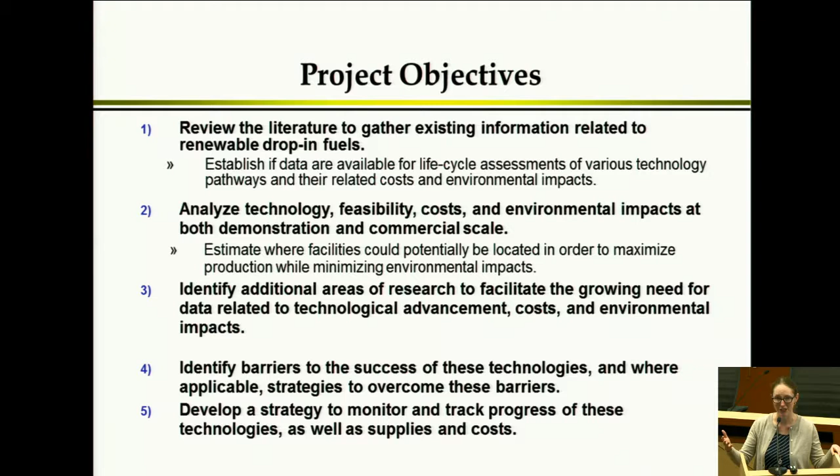that are more challenging to overcome, and figure out a strategy for updating the analysis, because things are always changing, new research is coming out, and so we have to be able to incorporate that quickly into the analysis if we want to do a refresh at some point and see where things are maybe 5 years from now, maybe even 10 years from now.

So I'll go through task by task, basically. Task one, we just wanted to review the literature and ongoing lab research that we're aware of, even if it's not published, and understand where things stand.

And just a quick bit of background about me. I've been working in bioenergy in some form or another since fall of 2007, basically. I worked primarily in the Energy Biosciences Institute, which was funded by BP. It was joint between UC Berkeley and University of Illinois, Champaign-Urbana. And once the funding wound down for that, I ended up transitioning over to the Joint Bioenergy Institute, and that's where I spend about half of my time now. And so, I've had a good perspective about what's been going on in the research space, at least at those two institutes, and more broadly.

So when we look at what fuels we're trying to replace, let's assume the goal is to replace petroleum in some way or another. Gasoline obviously has the largest share. This is in California, so a little over half of our crude oil goes to producing gasoline. The next largest, interestingly, in California is jet fuel, just by a little bit. So that's the slightly darker blue slice there. And then diesel's pretty close at 16%.

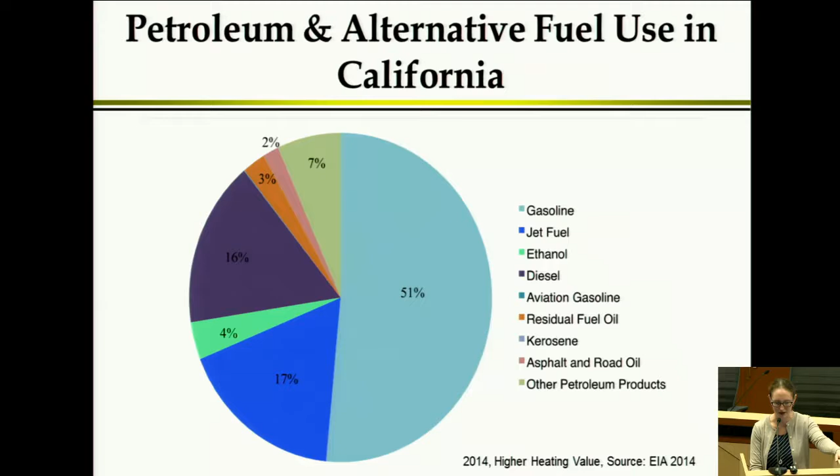So a quick review of the fuels we're interested in replacing. Diesel is about 75% saturated hydrocarbons, 25% aromatics. Gasoline has aromatics at about the same level, but more of these cyclic molecules, fewer of the straight long chain hydrocarbons. And jet fuel is a similar makeup to diesel, a little bit different, but often when people are looking at the mixture of fuel that they've produced in the lab, the potential jet fuel products and potential diesel products often look not dissimilar.

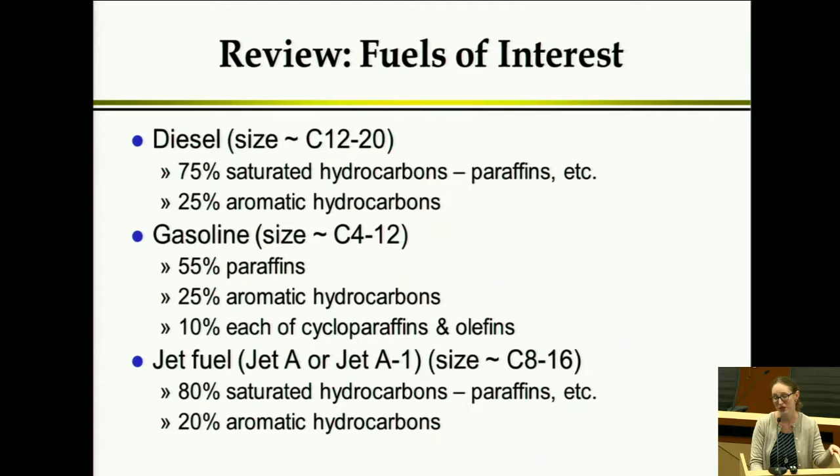And in the military, for example, they've considered moving entirely to jet fuel for the sake of ease of logistics. So, you can use jet fuel in diesel applications. There's some retrofits required, but that's one thing that they've been looking at, is just using jet fuel for stationary generators, for their vehicles, where you would typically be using diesel for some of those land applications.

So, general things to note before we really dig into the research. There are a couple different types of what we would call drop-in fuels. The first is you can make a bio-based crude that just goes into petroleum refineries. So that's the first place in the supply chain that you could insert a bio-based liquid. And then, in an ideal world, hands off, it behaves just like crude oil. You don't have to do anything differently.

That would be great. To me, that's the best case scenario, although nobody's really been able to achieve that. Usually the bio-based crudes, you can blend them at a pretty low level before you start having to make changes to your petroleum refinery. The other option is that you have a separate supply chain up until you make the finished product. And then that finished product can at least go into regular petroleum pipelines.

And usually when people talk about drop-in fuels, that's what they're talking about, is it can go into all of the same infrastructure. It can go into your engine. You wouldn't know the difference. And that's also pretty challenging for a few reasons that I'll discuss.

The term drop-in is used pretty liberally, I've found. It sounds great. It's a very catchy term. And so it gets used for fuels that you can't actually blend one-to-one, where you could just put 100% of this new fuel that you've produced in your engine and it would be fine. It's been used loosely to denote things that can be blended at more than a 10% level.

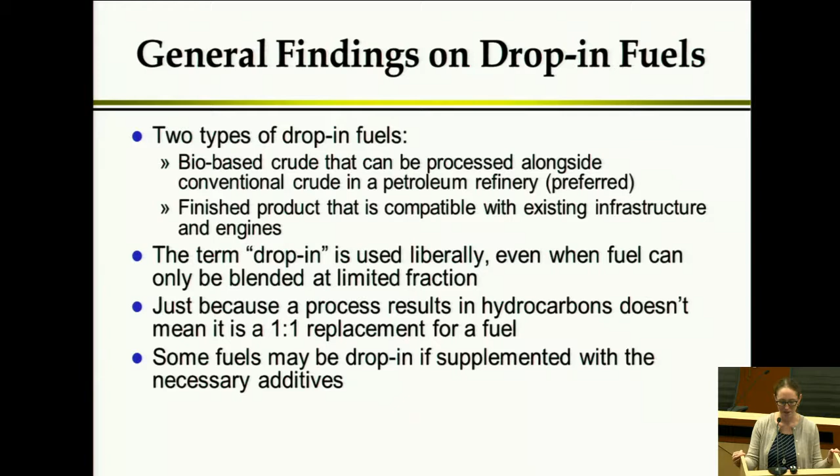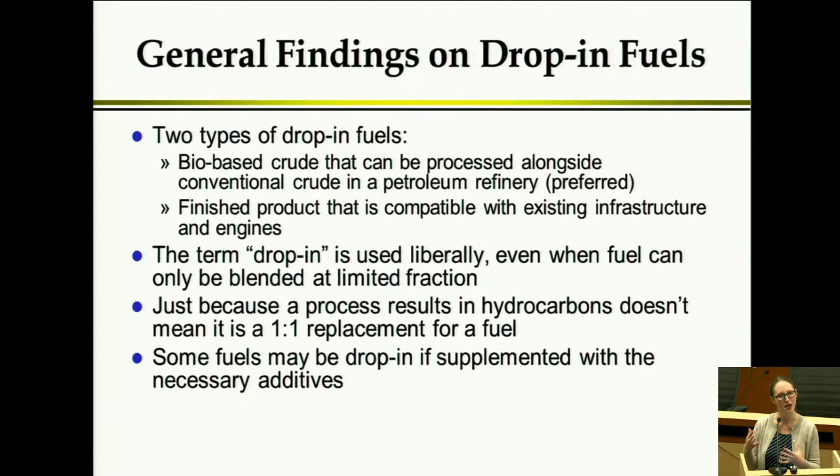And there may be instances where a fuel is drop-in, but you need some additives. An example would be sort of fuel oil that you could use in a marine application. So you maybe need some stabilizers or something. But in general, it's pretty close to drop-in. And so that's one example of something that's nearly drop-in, but again, the line is blurry.

The other challenge with these fuels is that, you'll see results. If any of you have dug into the literature, especially from the national labs, you'll see all of these reports where they do Aspen models and they say, look, you make this amount of gasoline, this amount of diesel, this amount of jet fuel. But the actual empirical research that's going on is at a really small scale. I mean, most of these labs are making like milliliters of fuel.

Engine testing people cannot take a milliliter of fuel and do anything. So, they need like barrels of fuel. And if you are in a small lab, you're sitting there at your bench, you're not going to make barrels of fuel. There's no way. And so there is something of a disconnect with these quote unquote advanced pathways. The research just hasn't gotten to a place yet where you're actually going to send it to a pilot facility and try to make enough for the engine testing.

And in some cases, it's sort of chicken or the egg. You don't want to make a whole bunch of it just to find out that it's a terrible fuel. On the other hand, you can't do much testing with the sort of volumes that are typically generated at bench scale research. There is a DOE-funded effort to try and bridge that gap called Co-Optima.

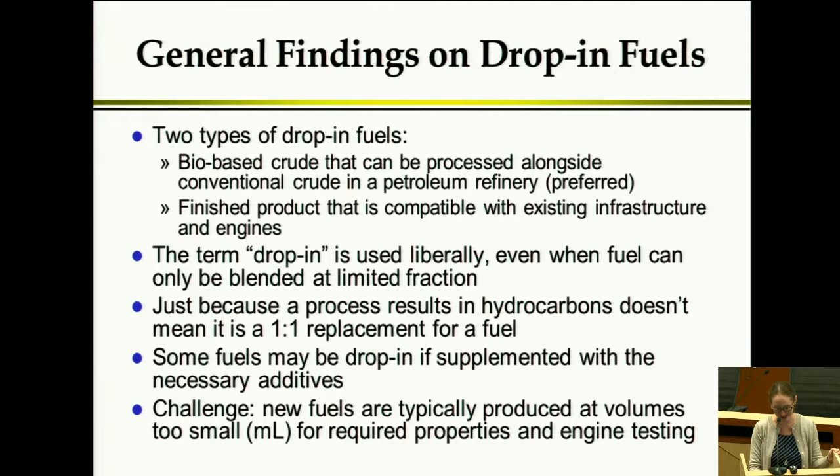And there are a lot of engine testing people who say, well, ethanol is really great. It's high octane. You know how to make it. It's cheaper to make right now than many of the others. Why aren't you just making ethanol? So it's tough. It's really tough to do this.

So what is a drop-in diesel? Remember, there are a lot of characteristics that you have to consider in making diesel that works with our existing infrastructure and engines. I will not read through all of these, but these are just some of the characteristics that you have to look at. Typically, biologists or chemists who are trying to synthesize molecules that would work as a diesel fuel are looking at the carbon number. They know it's more straight chain than aromatic, but they're saying approximate size looks about right. Probably a diesel or a jet fuel.

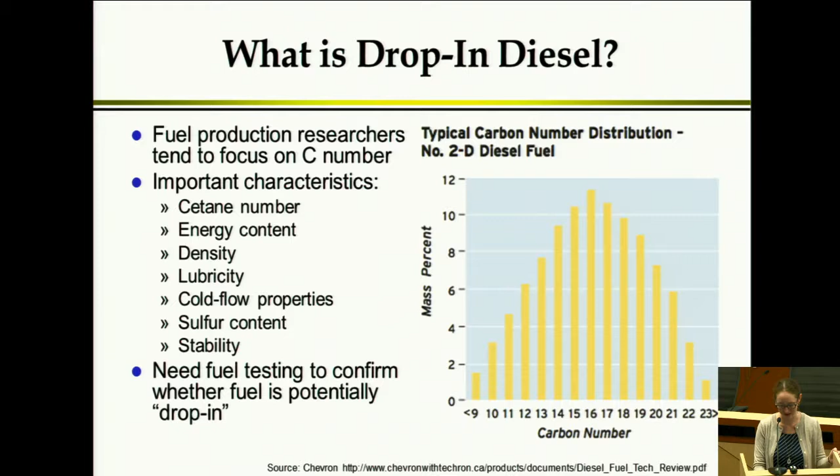And so you might write in your paper, this can be used as a diesel molecule or this can be used as jet fuel. There hasn't been testing on it, but you sort of eyeball it and that's the best you can do. Fuel testing is critical at the end of the day to really say whether or not it works. And we learned that the hard way with some research into jet fuel. It looked about right, but even at a 10% blend, it didn't perform very well. And you don't know that until you test.

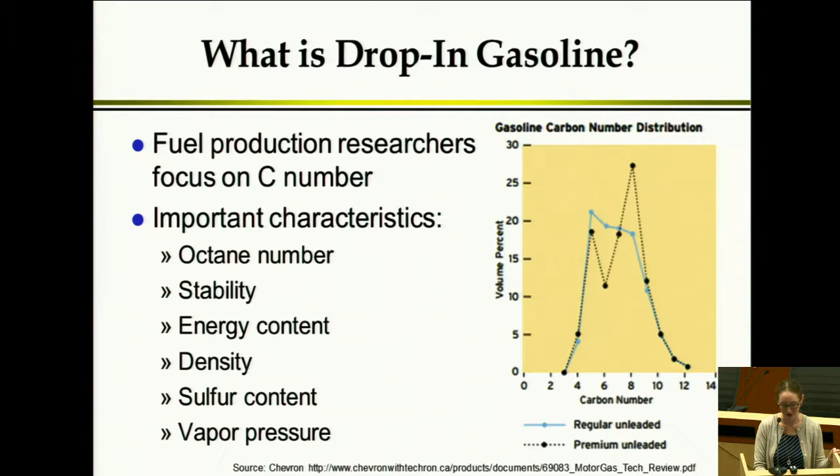So drop-in gasoline, again, there's this kind of distribution of ranges in terms of carbon number, some of the important characteristics, octane number, stability, the energy content. In some cases, something like ethanol does pretty well. In others, like energy content, for example, not so much.

So jumping to feedstocks. Why do we care about what kinds of feedstocks when we're trying to pick drop-in fuel pathways to study? Well, the reality is, depending on the kind of composition that you're looking at in your feedstocks, different pathways may make more or less sense. So here's a range of feedstock composition that you might see for typical biomass.

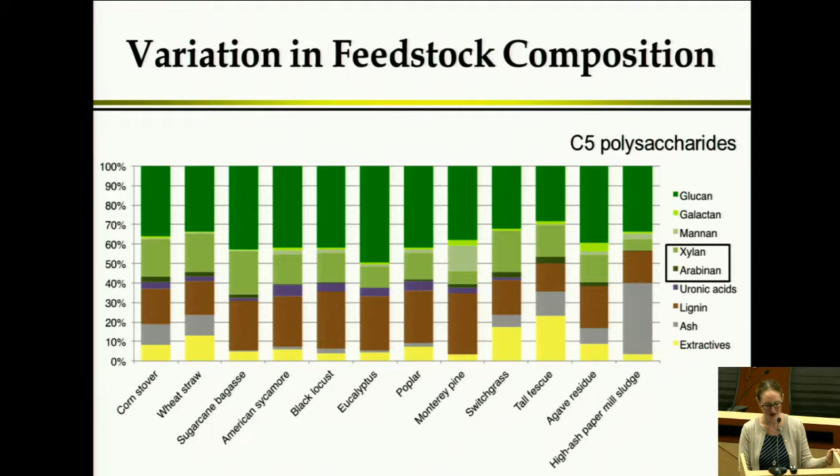Okay, so those first three there are 6 carbon polysaccharides. That means you can break them down into 6 carbon sugars. Bugs generally eat those pretty well, so a biological pathway, if you have a lot of sugars, that's good. There are 5 carbon polysaccharides. So 5 carbon sugars, bugs usually don't eat them as well, but they can still do it. Some can do it. Some engineered bacteria, for example, do it less well, and that's sort of a goal for synthetic biologists, but still okay.

And then depending on the ratio of polysaccharides to lignin, it may make the difference between choosing a biological pathway and a thermochemical pathway. And so the notion is, with the harsh thermochemical pathway, your yields of liquid fuel from lignin aren't great, but they're a lot better than 0, which is what you're getting with a biological pathway. These organisms, at least the ones that are typical in research right now, they don't eat lignin. It's really hard to break down.

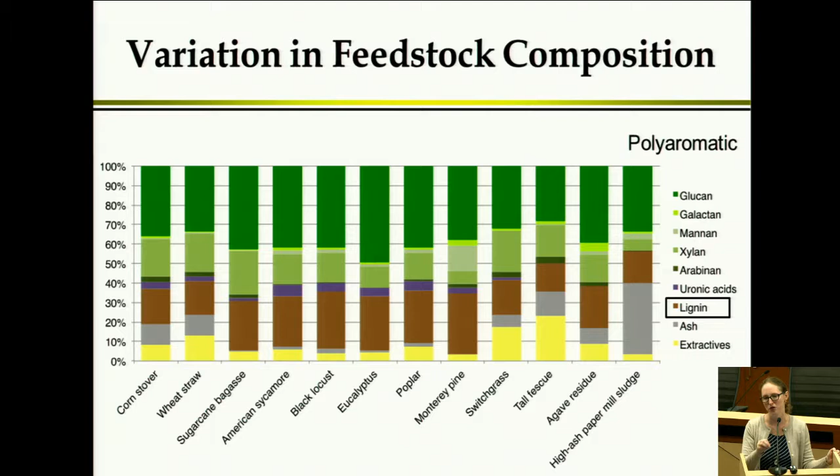In fact, some of the enzymes that are released will bind non-productively to the lignin. So the lignin has a negative impact on your yield from the sugars, in addition to itself not really being something you can break down. There are some fungi, for example. There's a lot of research going on, but everybody knows lignin's a problem, and we need to figure out how to do something interesting with it.

And so you'll notice that for herbaceous biomass, the ratio of the polysaccharides to the lignin is generally higher. So you'll probably see a lot of reports about dilute acid corn stover to ethanol, or any other process that involves fermentation or aerobic breakdown of sugars, and it's herbaceous biomass, and that's why. Whereas with woody biomass, you've probably seen a lot more thermochemical pathways, because the ratio of sugars to lignin tends to be a little bit lower. There's a little more lignin, less sugar.

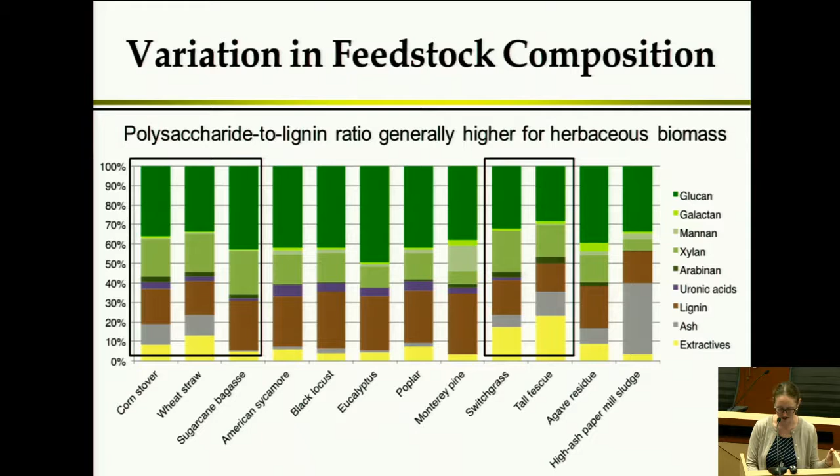And then, of course, there are the ash and extractives. You can recycle the ash and use it as a nutrient on the soil, but other than that, it doesn't do you much good. So the importance of composition. The old industry saying is you can make anything from lignin except money. That's not quite true with thermochemical processes. You break it down, you get some aromatic compounds in the liquid phase, and that's fine. But in general, it poses a challenge, especially for biological pathways.

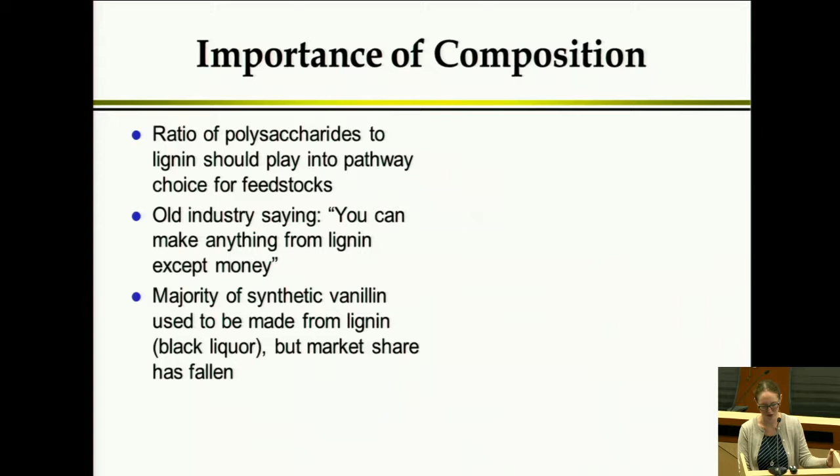There was a time when we made most of our synthetic vanillin from lignin, from black liquor from paper mills. In the early 80s, 60% of all the synthetic vanillin in the global market came from a single plant in Ontario. But the market share has fallen. The petroleum-based pathway has ended up being a little bit cheaper.

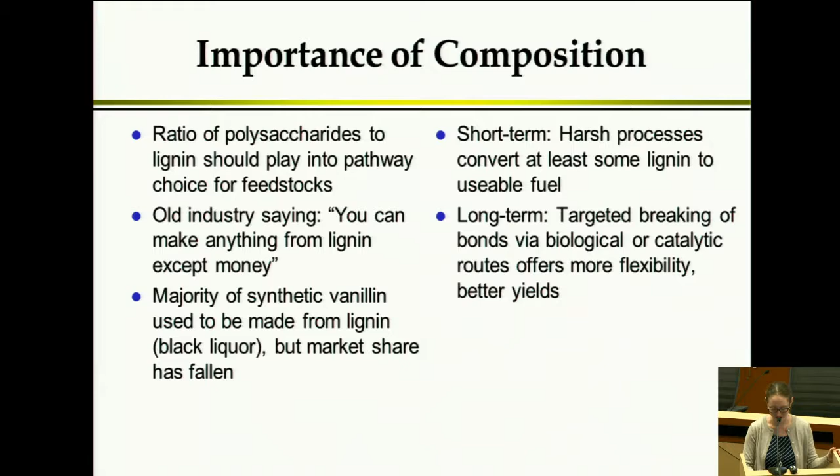So in the short term, the best we can hope for is a harsh process that breaks down some of the lignin into something we can use for fuels. It's not more valuable than the fuel, like a high-value chemical, but it's better than nothing. In the long term, you may have a little more precision if you can use catalysis or a biological route to selectively break bonds in the lignin and make perhaps some aromatic compounds, or you don't have to preserve aromaticity, and you'll get something more useful.

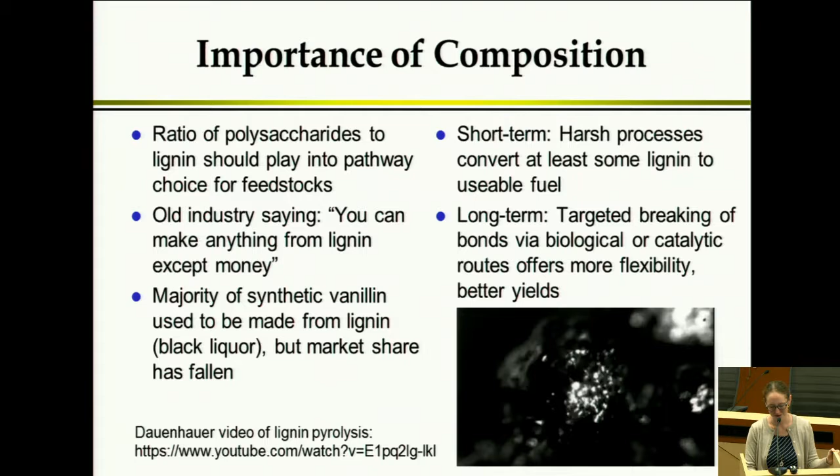There's a video online, and I put a link here, but it shows what happens when you pyrolyze lignin. You do get some liquid fraction, but a lot of it turns to char, and you'll see it bubble and then just solidify into this hard little particle. When I was asking around for perspective on what you could make out of lignin, this was the first thing that one of those professors sent me.

Let's see, is there a clock? Okay, perfect.

So, overview of pathway types. I've talked about a couple of them. Biological, you're using a host microbe of some sort. It could be bacteria, it could be fungi, to produce your fuels, or you could produce an intermediate that you do some downstream upgrading with.

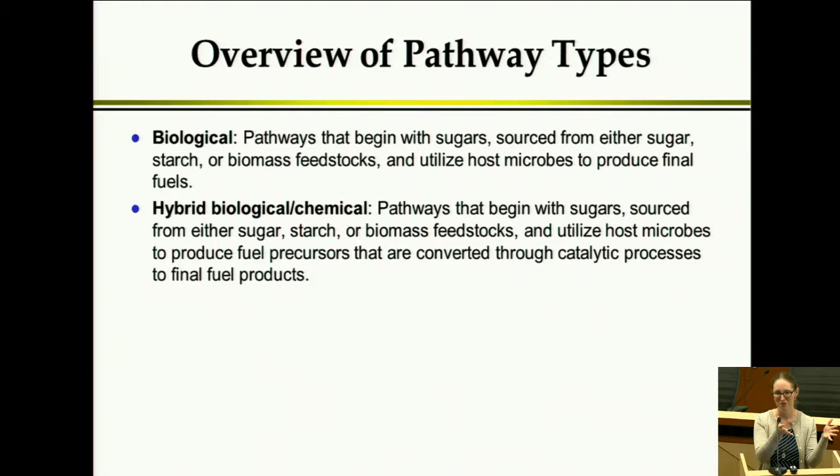Hybrid biological and chemical. So that's this notion of a sort of biology-based, usually that's the first step, is biology, and then you get some relatively pure compound, or in some cases a mix of compounds, and then you can do some downstream upgrading. So one thing you might want to do is, rather than relying on your bug to get rid of all of the oxygens, you could do like hydrodeoxygenation. Something like that, or maybe you dimerize and trimerize smaller molecules until you get the sort of carbon number that you're looking for.

Chemical pathways. So usually you would start with biomass feedstocks, sugars, lipids, and this would be sort of a case where it's not as hot as a thermochemical process, but again, there are no bugs involved. So it could be a room temperature process. And then thermochemical, of course, would be like gasification or pyrolysis.

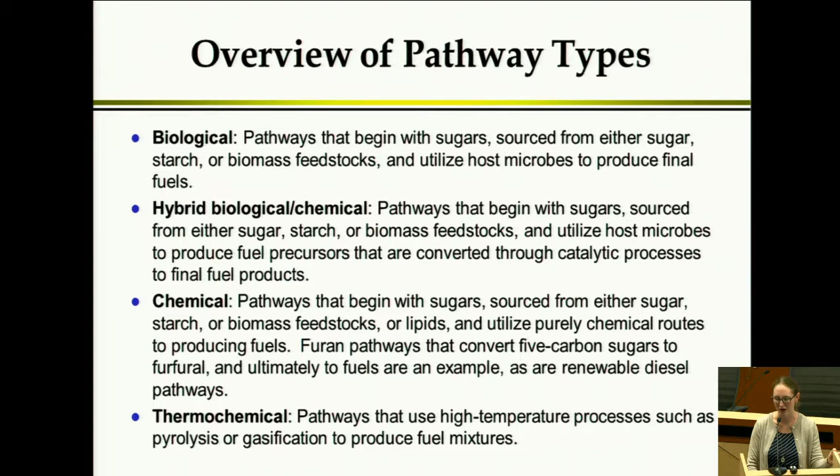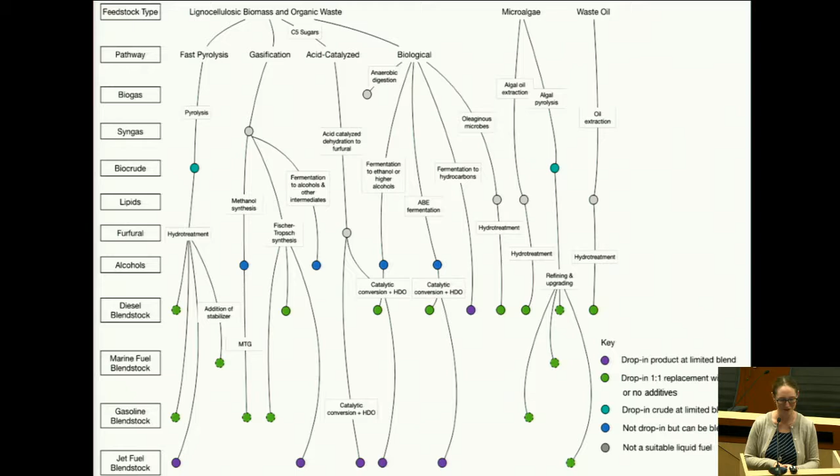So we went through and looked at sort of what all the options are. And I know that text is actually more readable than I thought it would be, but it is pretty small, maybe for those of you in the back of the room. But this is sort of the map of the starting points. So lignocellulosic biomass or organic waste, microalgae that produce lipids, or waste oil. And you can see basically where you can get to starting from those feedstocks using different routes.

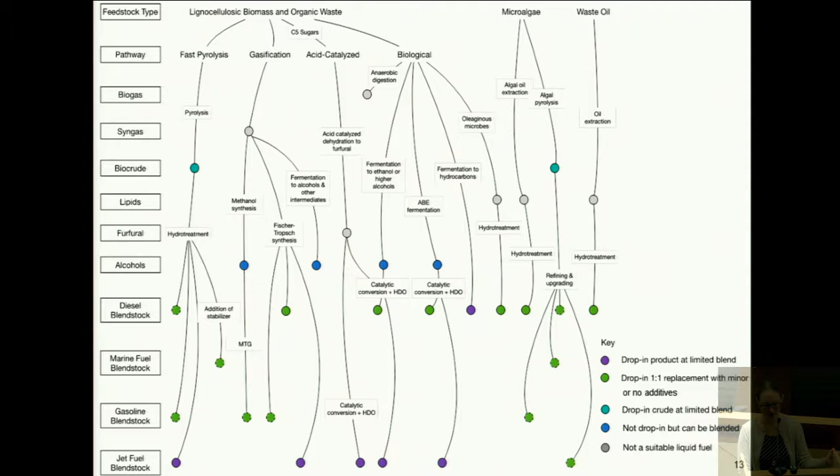And so there's fast pyrolysis, gasification, acid catalyzed breakdown of biomass to some intermediates like furfural, biological pathways. And so the green indicates that ending fuel is pretty close to a 1-to-1 drop-in with minor additives or blend stocks. The purple indicates a drop-in product at a limited blend. The aqua color is a drop-in crude. And again, some of these have not been totally verified, but at least, if it came from a company, they're saying that it works. And then the regular blue is not drop-in, but it can be a blend stock.

And so you'll notice that there are a lot more options for diesel than there are for gasoline. That seems to be a pretty consistent theme in the literature, is that it's easier to make a drop-in diesel than it is to make a drop-in gasoline. And that may have something to do with some of the emissions regulations, although I know that's changing for diesel. They're getting stricter.

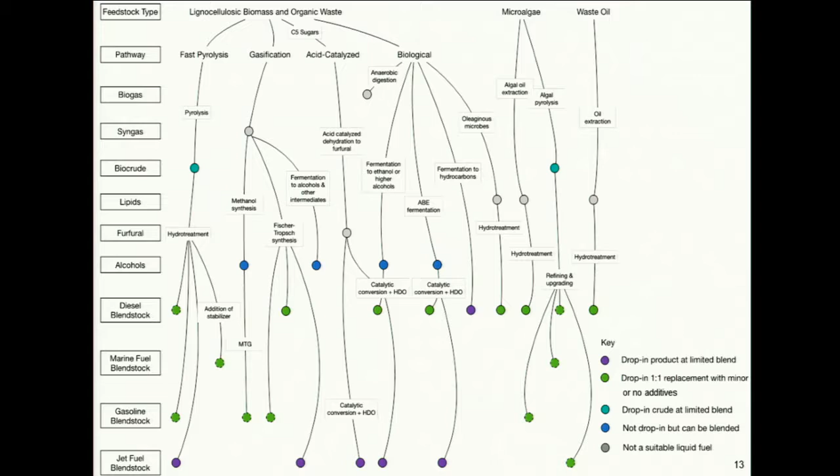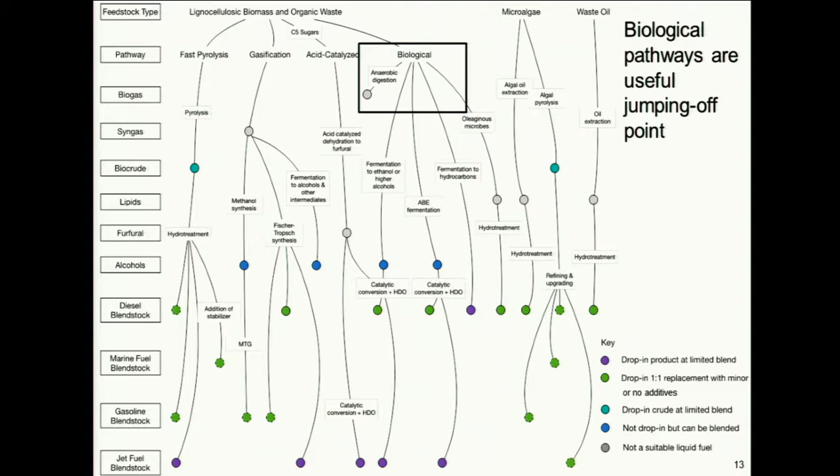So biological pathways are a useful jumping off point. There are a lot of options. You can make alcohols, you can make hydrocarbons, you can make oils. There are oleaginous yeasts, for example. You can do anaerobic digestion, make biogas, and start from there. And, again, you see there are more options for diesel.

So why did we choose to study thermochemical pathways for this project? So although some of the final fuels haven't gone through the rigorous testing, the blending limits may vary. They're probably not 100%. There's probably some limit to how much of these products you can blend. They are closer to commercialization.

The other reason is that California has a lot of woody biomass, and I'll go through that later when we talk about the scenarios, but assuming that we don't want to grow dedicated bioenergy crops like switchgrass, what we have to start with in terms of residues is very skewed towards the woody side. We don't have a lot of herbaceous residue.

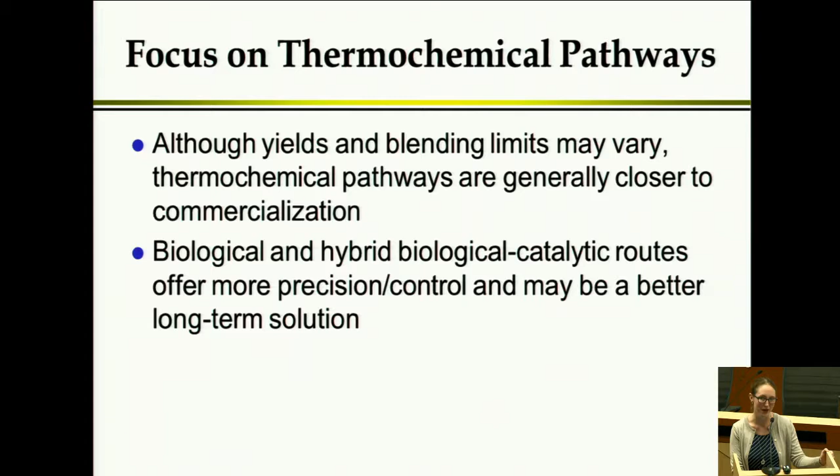And so, down the line, there may be biological or hybrid biological and catalytic routes that can offer more control in what you get out. But for now, I think the closest you can get to viable drop-in fuel pathways are these thermochemical routes. So let's go through the routes that we looked at.

So the first is fast pyrolysis. And so you get to a kind of biocrude, which you could blend at a low level in a petroleum refinery. But we assume that you are doing this process in a dedicated biorefinery all the way to the final product. So you heat the biomass rapidly. You have to grind it up into fine particles.

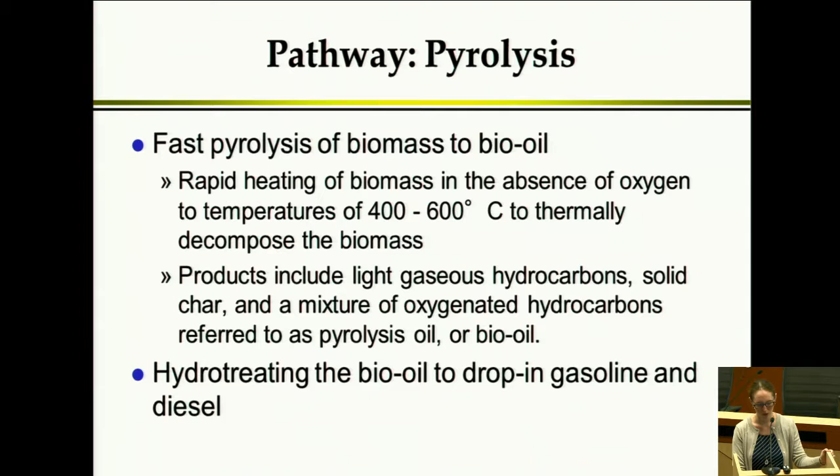It's about 400 to 600 degrees C, so it's a little bit lower temperature than some of the other processes we'll talk about. You thermally decompose the biomass. You end up getting a mixture of gaseous, solid, and liquid products, and that's basically always the case even with gasification. The notion is controlling what catalyst you're using and the reaction conditions to get the mix that you want. So pyrolysis is geared toward maximizing the liquid fraction. And then you can hydrotreat the bio oil and crack it into gasoline and diesel products.

So this is the process flow diagram. I know there's a lot of information in there. I'm not going to spend a ton of time going through everything, but you're basically drying the biomass, grinding it, pyrolyzing it.

You have to clean up the vapors. You end up with a gaseous product that, in this case, I think we reform a mixture of that plus some extra natural gas to get the hydrogen that you need for hydrotreating. And then the remainder of the solid product and some of the gaseous product, you can use those for on-site process heat and electricity.

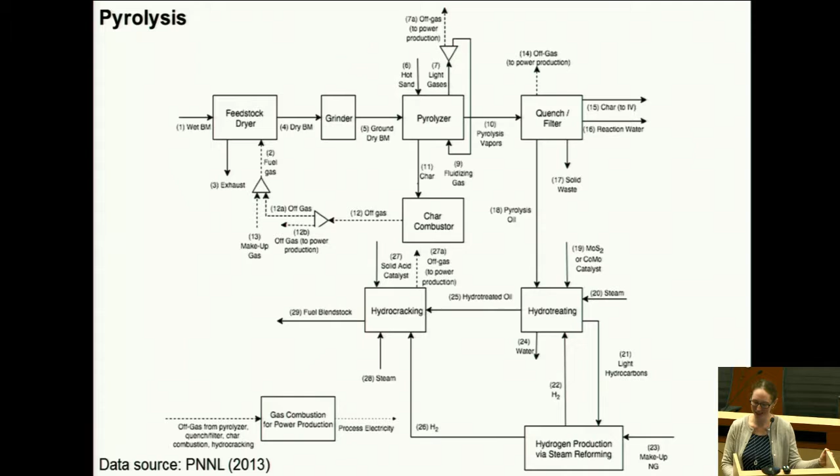Pyrolysis has the highest yield of all the processes that we look at, but the downside to that is that you don't have as much waste to use to generate your hydrogen and your electricity and heat on site. So you need to bring in some fossil fuel, some natural gas. And so from an emissions perspective, it looks worse, but that's because more of your biomass is going to the product that you actually want. So they could use somebody else's biogas from an anaerobic digester or something, and that would help. But that's sort of the downside to higher yield: the greenhouse gas emissions usually look worse.

The next pathway is gasification and Fischer-Tropsch synthesis. This makes primarily diesel. It's a relatively mature process, and we've talked about it for other fossil fuels. There's been talk of doing this with coal, for example, back when oil prices were really high. You can do this with natural gas, but you're basically making syngas. You're making carbon monoxide and hydrogen. It occurs at higher temperatures, like 800 degrees C, and then you use the water-gas shift reaction to get the right ratio of hydrogen and carbon monoxide, and the Fischer-Tropsch reaction grows these diesel chains.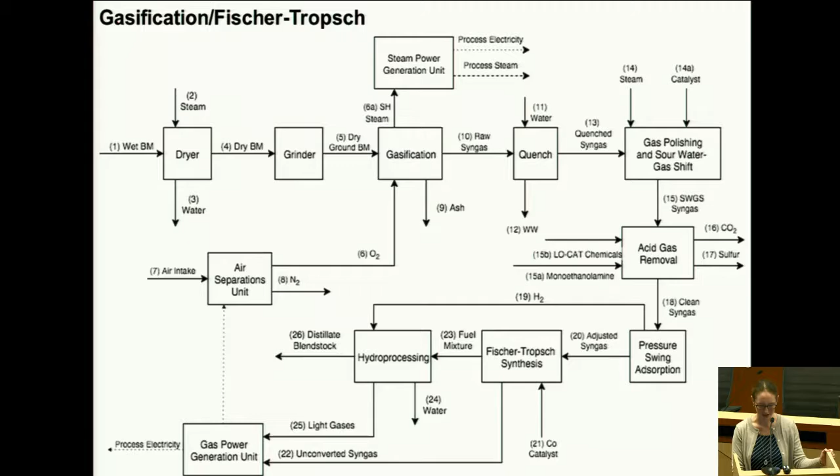So the next pathway starts with the same first step, gasification, and then there's the methanol to gasoline process that synthesizes gasoline. So it's, again, a relatively mature process. It's something that Exxon has built at least one plant for. This came up in Co-Optima as well, and there was some debate about the properties of the fuel. Maybe it wasn't high octane enough is what I recall the engine people saying. So who knows, maybe it's not that great. But it may depend on what catalyst you're using in terms of the mixture.

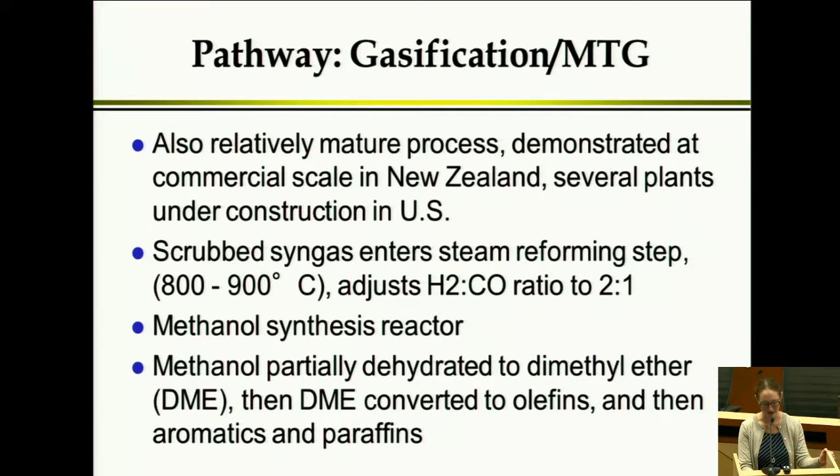So let's talk about how these look in the California context, given all of the biomass that we have. So we came up with a set of scenarios, and the idea was to establish some objective functions and constraints of interest, and then see where that gets us. So the first three scenarios, we looked at maximizing one fuel or another or all. So maximize gasoline, maximize diesel, or maximize total fuel yield, and you don't care what kind of fuel you're making.

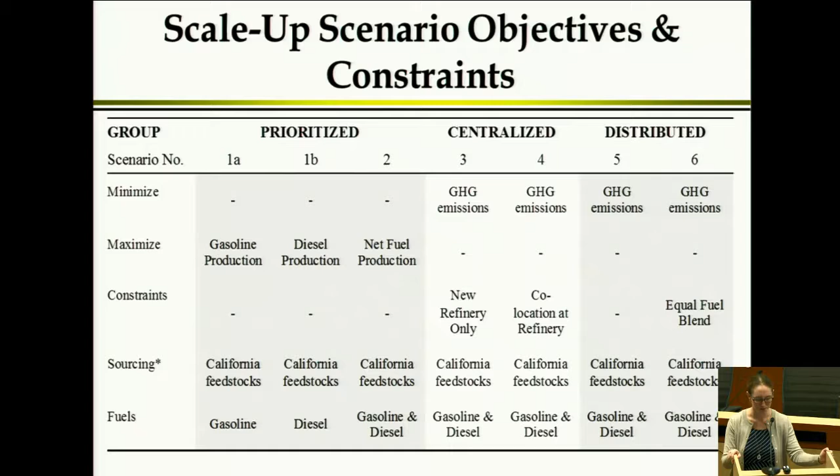Sourcing always California feedstocks. We did actually run a little bit of analysis just out of curiosity with data we already had to see how much biomass there would be just outside the state borders. But for the purposes of this project, we focused on just feedstock available in California. Again, depending on the scenario, you make some mixture of gasoline or diesel or just one or the other. For the centralized scenarios, we looked at minimizing greenhouse gas emissions to see where that got us.

And then we were interested in a couple of different strategies. So one, you're just building new biorefineries wherever you want. In another scenario, you're co-locating your biorefineries with petroleum refineries. So the notion would be that there may be some shared infrastructure. If you need extra hydrogen, perhaps you'd like to import hydrogen from the petroleum refinery if they have it. Maybe it's useful for them to do the blending on site, and then it just enters the fuel distribution infrastructure right there.

And then for the distributed scenarios where we have lots of little facilities, we looked at a scenario where you basically want to equalize the blending level. So let's say these fuels aren't so fabulous as one-to-one drop-in.

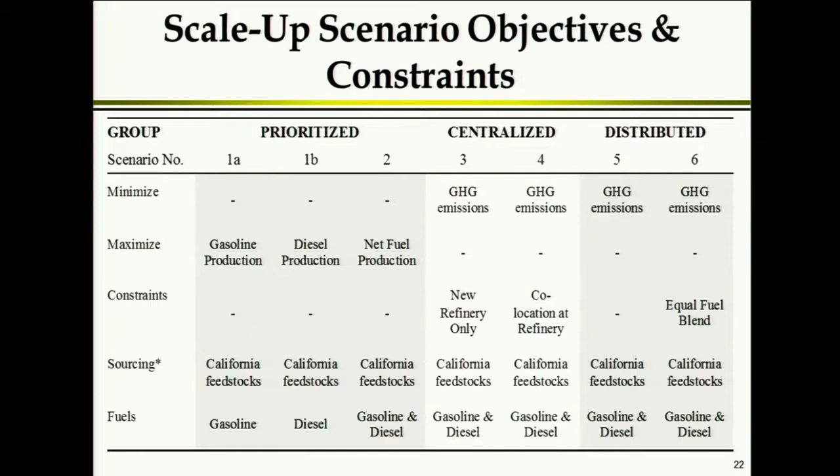And so you want to kind of spread it out as best you can amongst all the retail stations. So nobody has a really high blend and nobody has a really low blend. They all have like a 14% blend or whatever it is. And we wanted to see what that looked like. So there is a model.

It's on GitHub, for anybody who doesn't know what GitHub is or just wants to know more about it, you're more than welcome to come talk to me. This is some of the work that Mike Taptich led, but I will do my best to answer your questions. And of course, you can dig around in the code and the data sets that it generated online, freely available. It's sort of wiki style. You can even leave comments and stuff. And I guarantee you, we will read comments. There's not been a ton of activity, so we would be really excited if somebody actually wrote something.

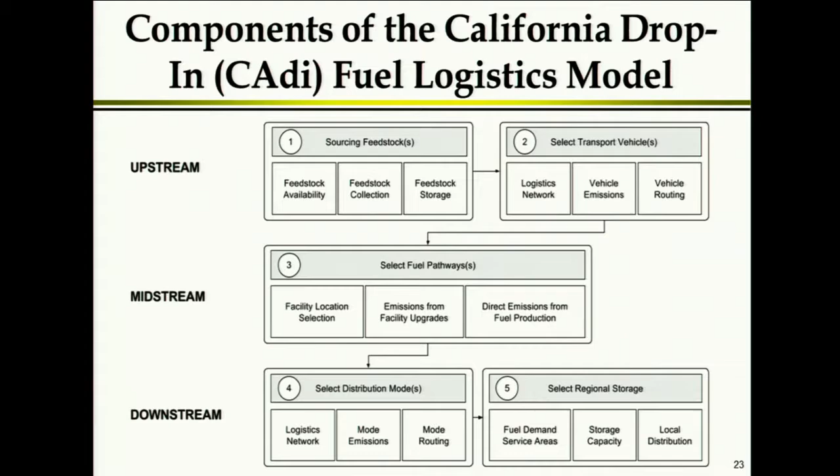Okay. So distribution of biomass in California. I mentioned that we are pretty woody biomass heavy, and you can really see that in this biomass availability chart up at the top right. So forest residue, primary mill, those together make almost 3/4 of our total solid biomass resources. We did not look at food waste, any of these kind of heterogeneous wet wastes that you wouldn't want to send through a process that requires drying first. So this is solid, relatively dry biomass, not wet waste. Crop residues make up about 1/4 of our total biomass resources.

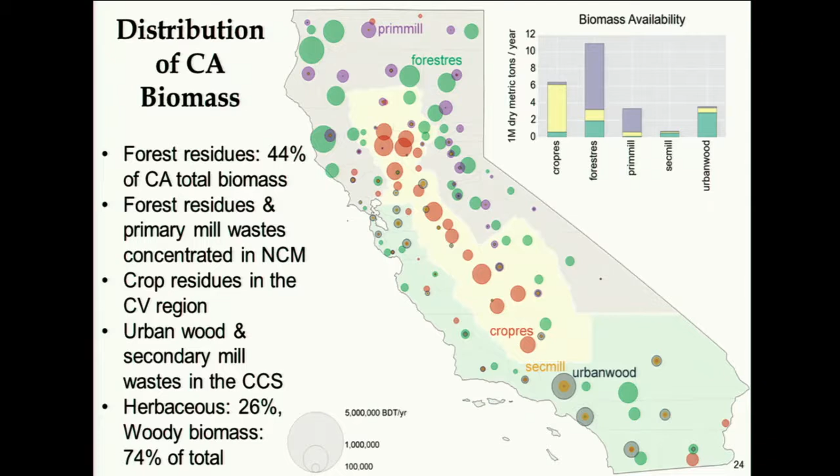And you can see that a lot of the forest residue in particular is concentrated up north. Now, how that'll change with the bark beetle infestation and the drought, which are related, is yet to be seen, but I think there's a lot of tree mortality happening in the more central part of the state, and the Sierra Nevadas. And so we may see more forest residue becoming available in those regions. I think this map may very well shift over the next 5 years or so, depending on forest management practices.

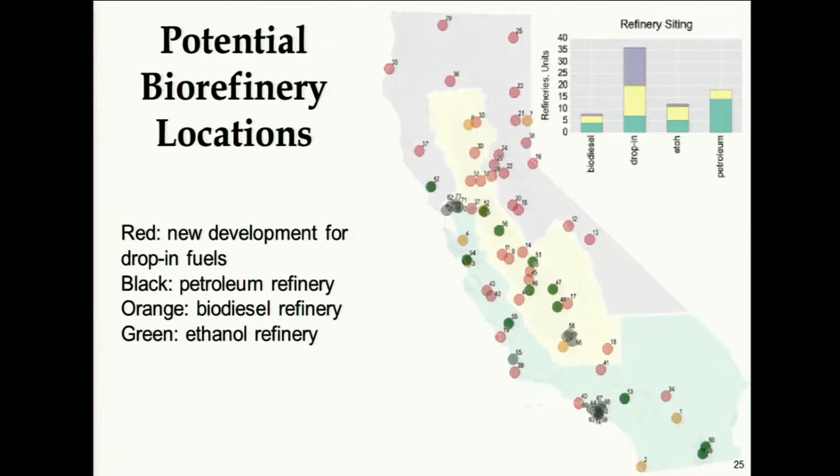Okay, so potential biorefinery locations. I still have the feedstock availability chart up just for reference. In the red dots, you can see new development for drop-in fuel. So there's no facility there right now. These are locations that we would be considering. The black, or rather it looks kind of gray on this chart, are existing petroleum refineries. Orange are biodiesel refineries we have in the state. And then green are existing ethanol facilities. So you can see they're concentrated in the Central Valley, although we do have a few in the south and on the coast. We also looked at bulk fuel terminals.

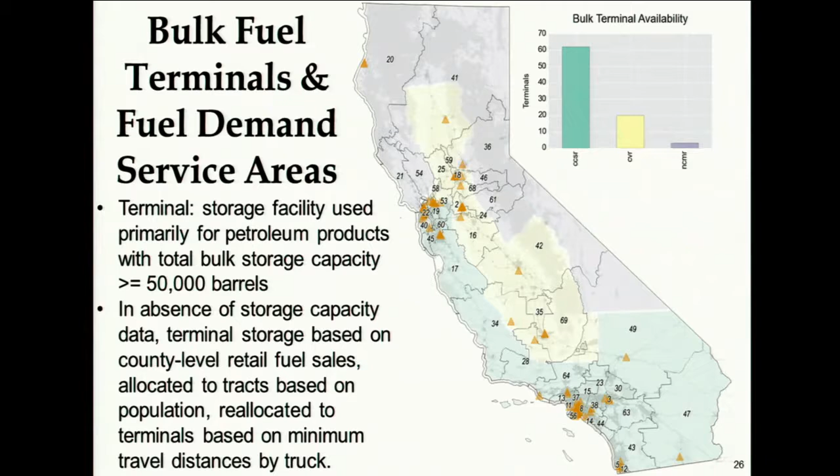So that's an important part of the logistics picture, understanding once you have a liquid fuel product, where it can go. And of course, those are all built based on where the petroleum refineries are right now. That makes total sense. That's not to say that we wouldn't necessarily build new bulk terminals if we had a bunch of fuel being produced up north where all the forest residue is. But for now, this is our infrastructure. And since we're looking at drop-in given what's already built, that's what we wanted to look at first. So these are defined as bulk storage with a capacity of greater than 50,000 barrels. We didn't have individual storage capacity data for these terminals, but we did our best to estimate that, and I'd be happy to discuss the methods for doing that.

So the cost and life cycle assessment, let's talk about the yields first. As I mentioned, pyrolysis generally had the highest fuel yield, and you can see here it varies depending on who's modeling it and where the actual experimental results came from. And again, typically people are doing little pieces of these processes at a pretty small scale, and then a team ideally is responsible for building a hypothetical, usually an Aspen model or a SuperPro model, of what a commercial scale facility would look like. So NREL, PNNL, it's not like they have some big facility that they're running and just collecting data and reporting it. This is very much simulated data. And we used a lot of their assumptions and their modeling results.

So pyrolysis, usually the weight yield is somewhere between 20-26%. You can see that converted to gallons of gasoline equivalent per metric ton of biomass. For Fischer-Tropsch and MTG, it hovers around more like 15% or so. But again, these are different feedstocks, so it'll vary a little bit. I would guess that with pyrolysis, it might even go up a bit if you were doing all herbaceous biomass.

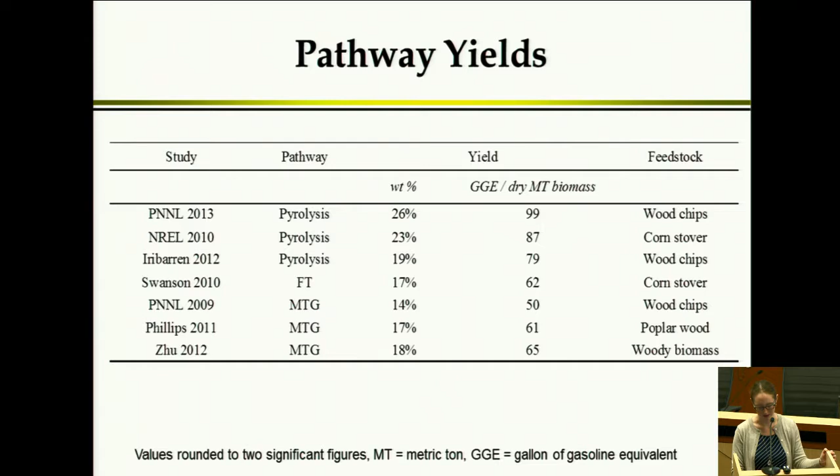But it's tough to say. So energy demand by pathway. The electricity demand for pyrolysis and gasification is actually higher than for pyrolysis where you're getting hydrogen from offsite. But we have found that even with a similar configuration, it's hard to say who's right.

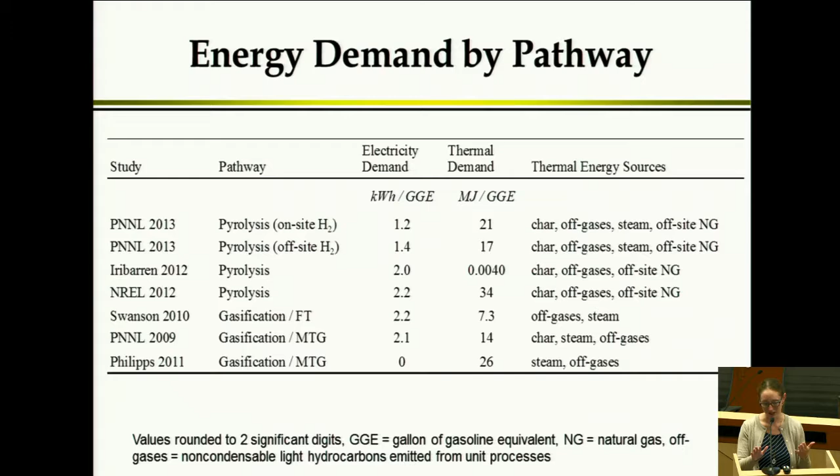There are multiple models that give you different energy demand, and trying to reconcile those and understand how their assumptions are leading to such different results was a real challenge for us. But in general, pyrolysis required actually quite a bit of energy beyond what was available from the biomass.

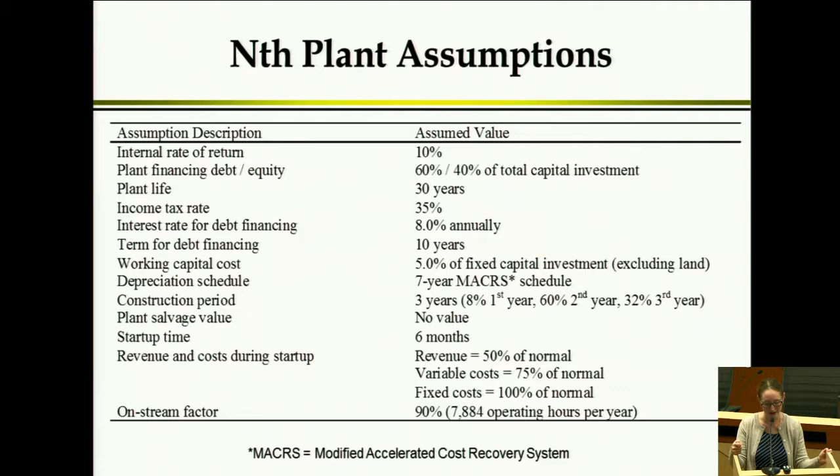Nth plant assumptions. So these are all pretty standard. A 10% IRR is what everybody uses. There are some industry people who've said, oh, it should be 20%. That's very aggressive. That would make it really tough to be cost competitive, but there have been some people who've given that feedback. Again, we can go through some of these financial parameters later for those who are interested.

So in summary, the first thing to note is that these thermochemical pathways tend to be less capital intensive than biological pathways. And so it's going to be easier to get a thermochemical plant financed. And at the end of the day, when we did our best to normalize the modeling results that are out there, the capital costs were pretty similar. Fischer-Tropsch ended up being a little bit higher, but they're all in the same ballpark.

And when you actually looked at minimum selling price, they're quite close. In fact, Fischer-Tropsch ended up being the highest because of the higher operational costs, as well as capital costs. Plant life. So there were a couple things that we noticed were inconsistent, and it's unclear if those were based on technical realities or if those are just different assumptions that people make.

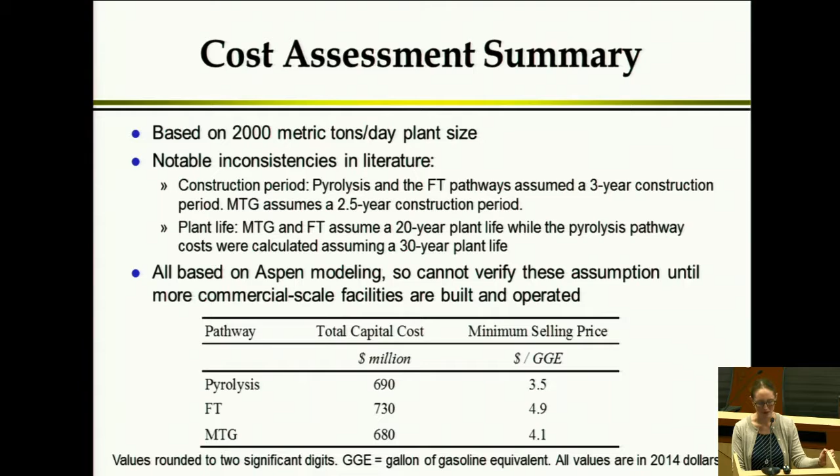One is plant lifetime, 20 years versus 30 years. 30 years is pretty standard. 20 years seems kind of short, but there were some studies that varied on that. And also construction period, whether it's 2.5 or 3 years, although that didn't make as much of a difference.

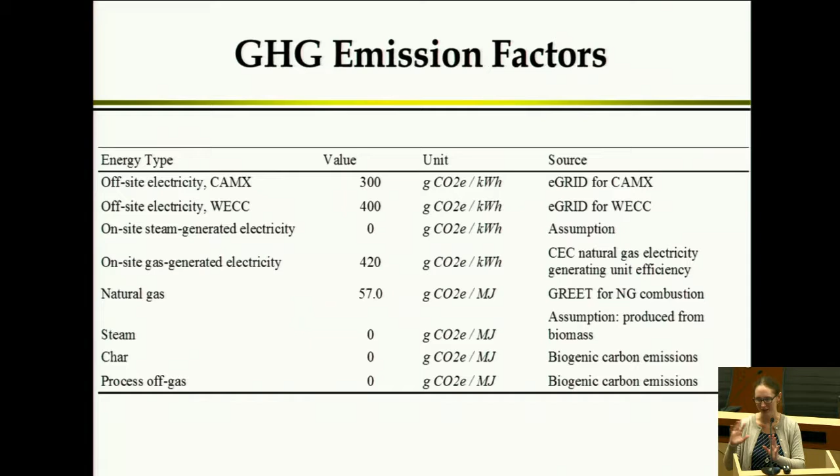So emission factors, we don't have to spend a lot of time on this, but one important takeaway is that we assume that biogenic carbon does not count. So we say, all right, the plant is sequestering atmospheric CO2, so any carbon that's released when you're burning char or the gaseous product is zero. It all balances out.

So greenhouse gas emissions for comparison, you can see how that stacks up and the different components, how they contribute to the overall greenhouse gas footprint. It does depend on what electricity mix you use, and I don't know if there's a standard assumption for CAMX versus WECC. We tend to use WECC, but we did do a sensitivity analysis with both.

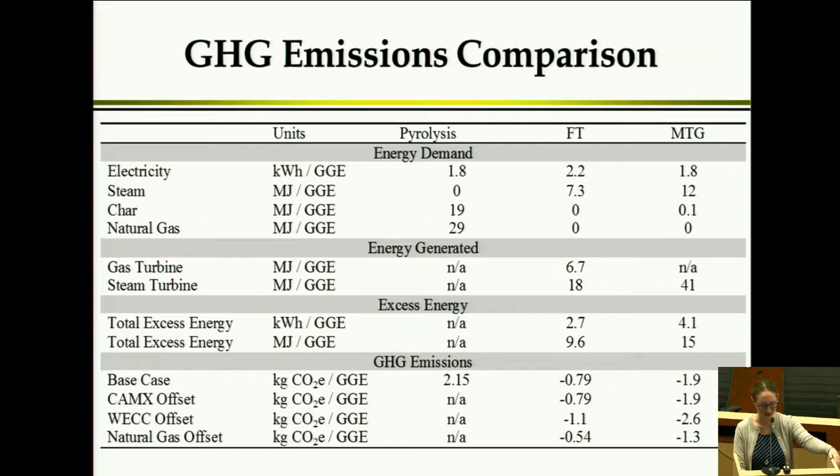And so the final results, if we look at yield and greenhouse gas emissions. So if you don't include electricity credits, methanol to gasoline and Fischer-Tropsch are basically zero carbon for the biorefinery. So they don't use any fossil carbon. There's a little bit for construction, but normalized over the plant life and the total production, it's basically zero.

For pyrolysis, the emissions are quite a bit higher, and that's just because you use so much of the biomass for your liquid fuel that you don't have enough waste left to supply energy at the plant. Again, purchasing any sort of renewables would technically solve this problem. But the yield is also higher for pyrolysis than it is for Fischer-Tropsch and methanol to gasoline by almost 50%.

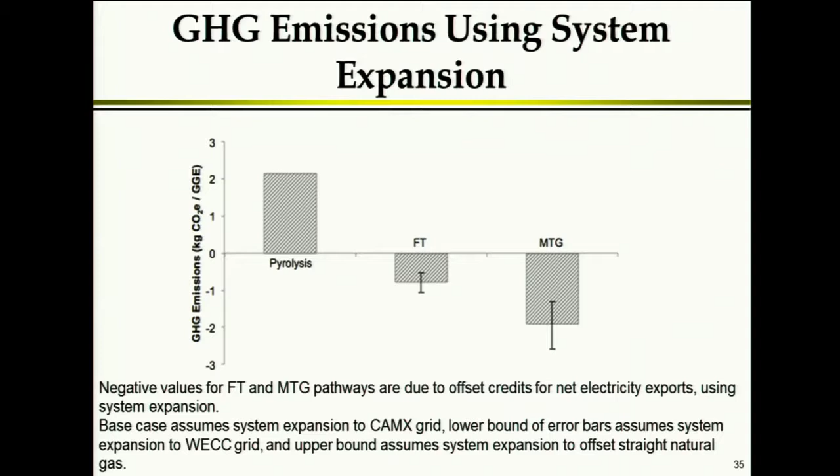So greenhouse gas emissions using system expansion, once you look at the electricity offset credit for the two types of facilities that are net exporters of electricity, they become negative, and this range reflects different electricity mixes that you may be offsetting, anything from just assuming only natural gas to CAMX and WECC.

We also did criteria air pollutant emissions, and in general, these are quite a bit lower than for, say, gasoline or diesel. However, we didn't want to do a comparison because the actual tailpipe emissions for these fuels are not well characterized. As I mentioned, we're not producing them at the quantities that you would really need to do engine testing, and so until we have a better sense for what the tailpipe emissions differences are for a blend versus regular gasoline or diesel, I think a comparison would be almost misleading. But yeah, compared to the upstream emissions for gasoline or diesel, these all look pretty good.

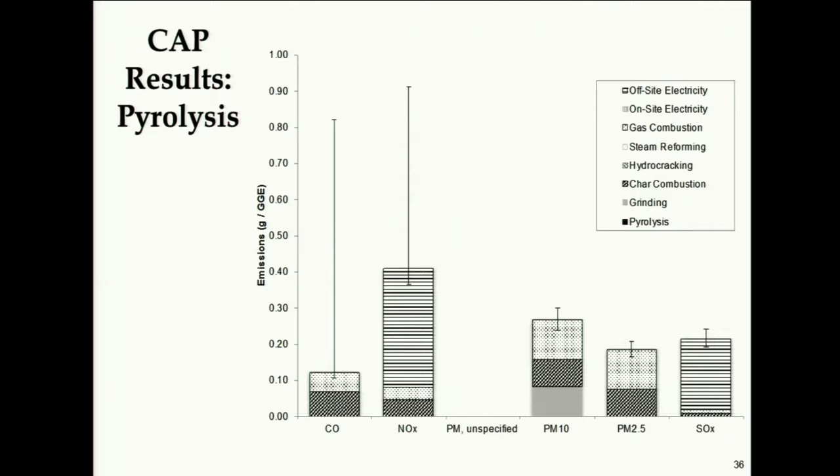There was some question about the PM emissions for any facility that burns char on site, and there's the regulatory considerations. So in California, what we ended up settling on is that basically, you're not going to be able to site that facility unless you can meet the same standards that a natural gas boiler, for example, can meet. And so that was what we assumed. They meet the same standards as for a natural gas boiler. And even then, there's some variation depending on what facility you're looking at in California, what values they were permitted for.

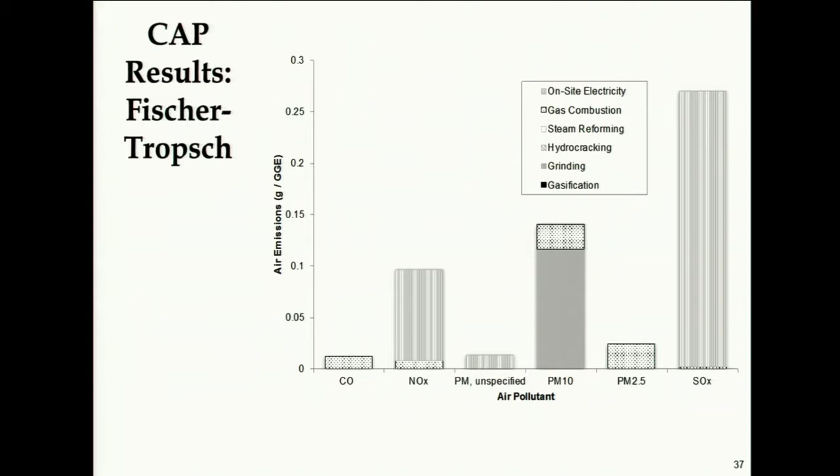Fischer-Tropsch, again, these are all quite a bit lower. There were more SOx emissions. So remember, for Fischer-Tropsch and methanol to gasoline, you're burning more biomass fuel on site, so char, and any sulfur that's left there. You still do flue gas desulfurization, but you do have higher SOx emissions than for pyrolysis, where you're burning less biomass fuel on site and more natural gas.

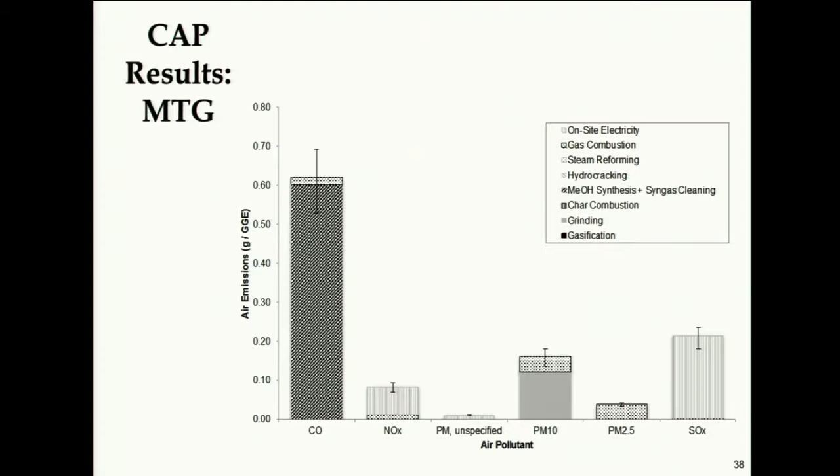And so methanol to gasoline, again, you have pretty high carbon monoxide emissions, and that's from combustion of the light products. And then you can see the SOx emissions are up there too. So total net emissions with the electricity offset credits, many of these could be strongly negative. And that's because if you're offsetting electricity, there are emissions associated with that as well, especially if you're in WECC. That includes a fair amount of coal, although shrinking, a lot of coal plants in the U.S., WECC included, are being decommissioned. But pyrolysis ends up being the only one that's consistently positive. Many of the other ones are net negative.

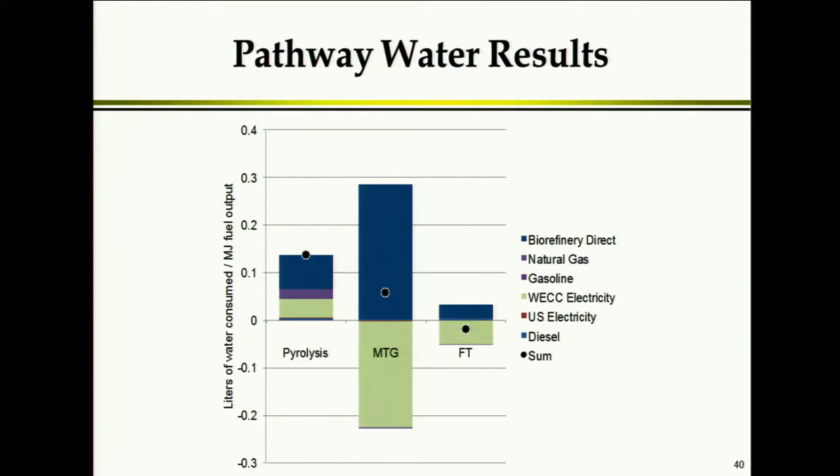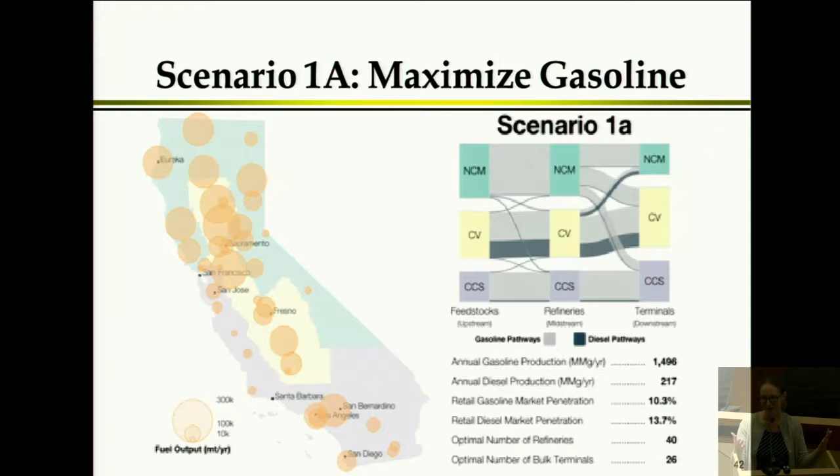So just going through our scenarios quickly, I talked about what the assumptions are, the objective functions and the constraints behind each of these earlier. Let's see. It does look lower resolution here than it did on my computer, but hopefully you can still see it. This is where you really get to see a sense of scale. So I think, to me at least, that's helpful, and the geographic distribution of the fuel production.

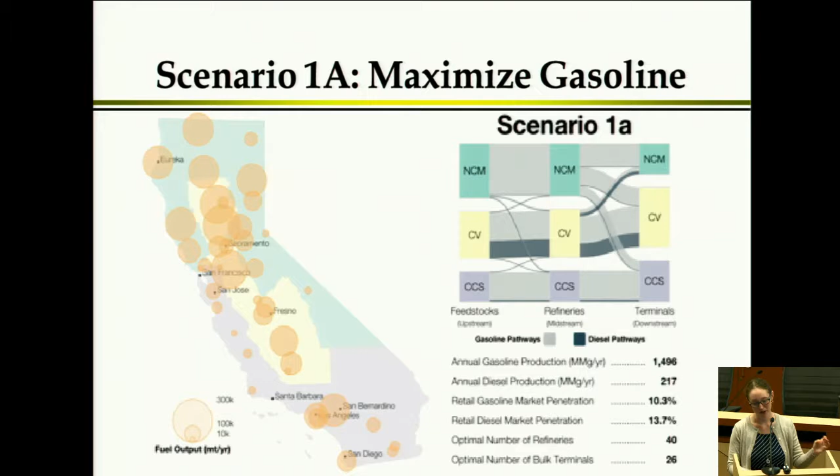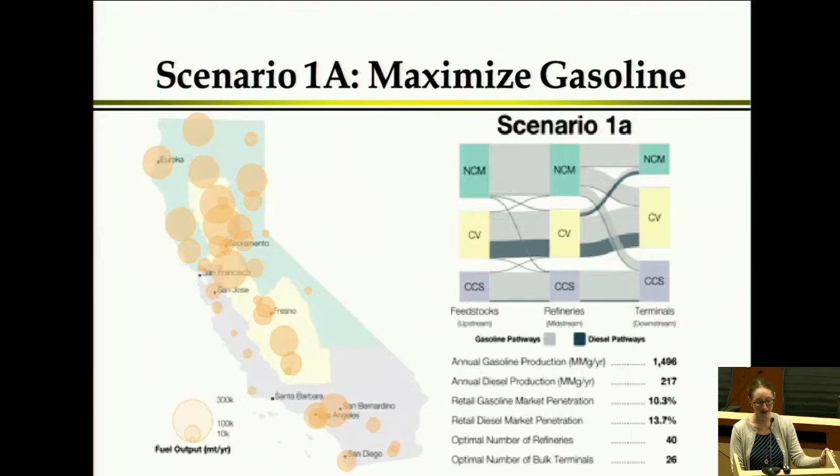So, the first thing to note is if we're maximizing gasoline output, that means we can offset about 10% of total gasoline demand in the state and about 14 or so percent of diesel use in the state. So it's not a huge amount, but again, this is with no dedicated biomass crops. This is just with the residue that's available. And you can see the total production numbers here. There would be 40 biorefineries using 26 bulk terminals, and a lot of that production is concentrated in the northern and central part of the state.

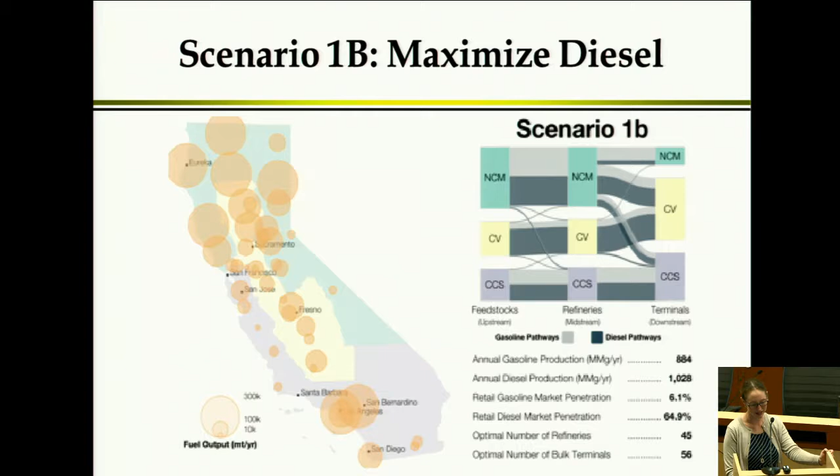If we want to maximize diesel, you can really take a chunk out of the diesel market, in part because the diesel market is smaller. But you can offset about 65% of diesel demand in the state with these drop-in fuels. And in that case, you still do make a little bit of gasoline because these processes generally produce multiple products. So you're about 6% of gasoline demand. And again, concentration of production in the northern part of the state and the southern part of the state. If you want to maximize total fuel output, skew more towards diesel.

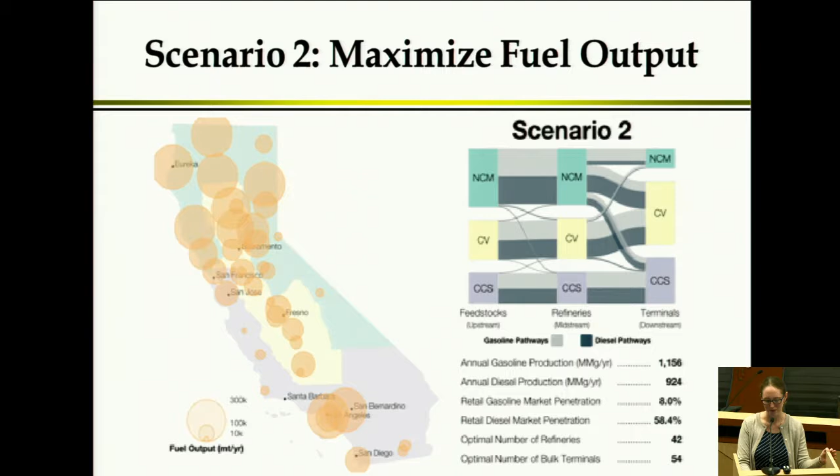That's something that comes up again and again, even though gasoline is a larger market, I think there are a few reasons why focusing on diesel is not a bad idea. The first is that you have a lot more options in terms of processes that get you to a drop-in-esque diesel product. The other argument for that is it's going to be really hard to electrify heavy-duty freight, in the same way that it's going to be really hard to electrify air travel. And so looking at jet fuel and diesel replacements may be a really good long-term strategy because those sectors have fewer options. Passenger transportation makes up a lot of gasoline demand. You may be able to take a pretty big chunk out of that with electrification, or at least I certainly hope so.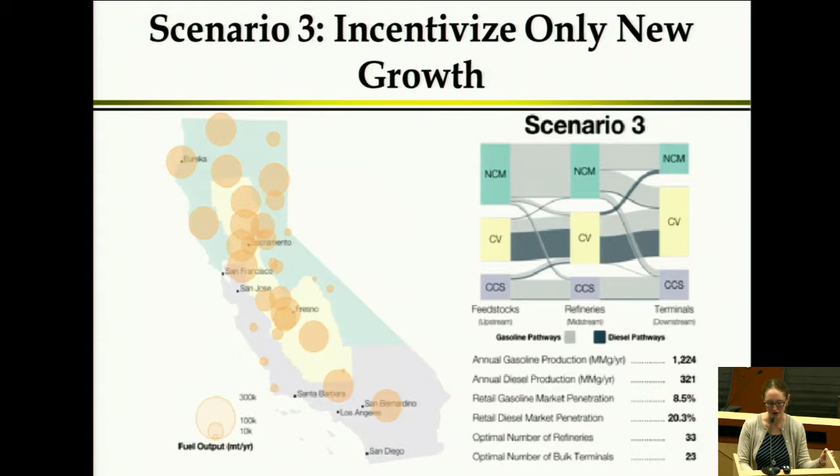So in this case, you offset about 60% of diesel market and about 8% of retail gasoline market. And I should mention, we say retail because this does not include the wholesale market. It is smaller, but it's an important technicality to note. Scenario 3, incentivize only new growth. So in that case, you still make more diesel, but you make less fuel in general. So you can see the numbers here. It totals to about 2,000. This is about 1,500 million gallons per year.

If we focus on co-location, so rather than in scenario 3 where we're looking at just new biorefineries, trying to build biorefineries that are sort of attached to petroleum refineries, you still get a pretty similar sort of mix between diesel and gasoline, and you get about the same total production.

It was interesting. We brought this up to BP, who were our funders a few years ago, and we asked them if that was something that would be interesting. A lot of these oil companies are investing in bioenergy research. Would you want to co-locate a biorefinery with your petroleum refineries? And they felt that was a big perception issue, that if you're going to build a clean, renewable site, you really don't want to put it next to a petroleum refinery. It's going to make people feel a lot less warm and fuzzy about your biorefinery.

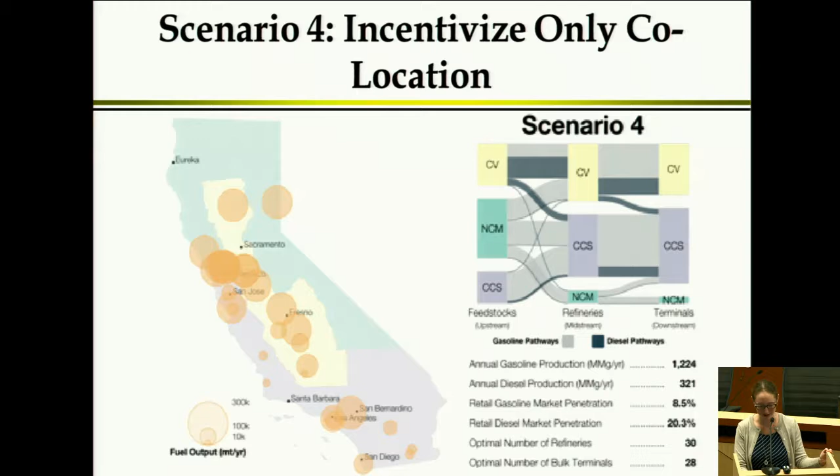So I thought that was interesting. It's really not relevant from an engineering perspective, but at the end of the day, those sorts of things may actually determine what choices are made about how to build these out.

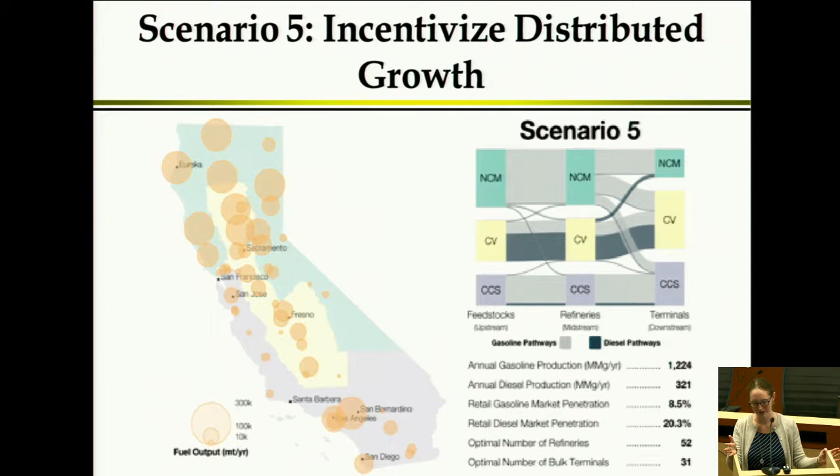Incentivizing distributed growth. The results look basically the same as the last two scenarios. In fact, they're exactly the same. Equal blending. So again, very similar results. And the idea here is that you have an 8.5% blend throughout the state and a 20% blend throughout the state for diesel.

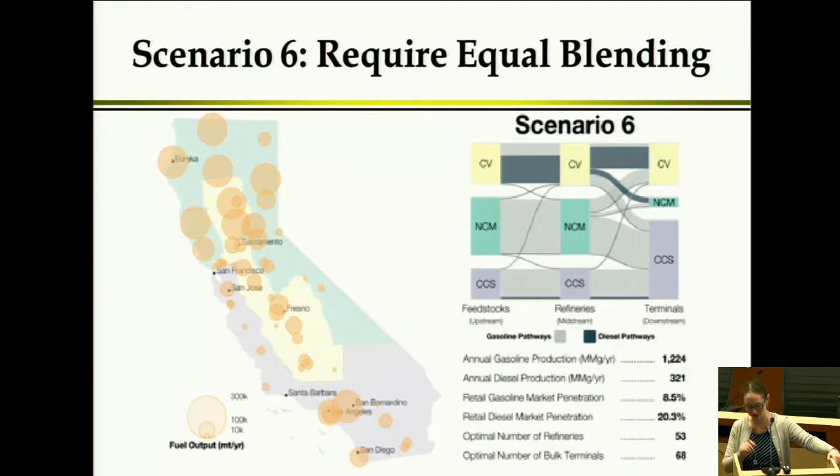So what does it look like in terms of logistics? Transportation is brought up as an argument for drop-in fuels, like, then we don't have to truck this stuff around. You can just put it in pipelines. The reality is that a lot of the ton kilometers happen upstream. Moving the biomass is the worst part of the bioenergy supply chain in terms of transportation. And so if you can find a way to get that biomass on a rail line, that really helps.

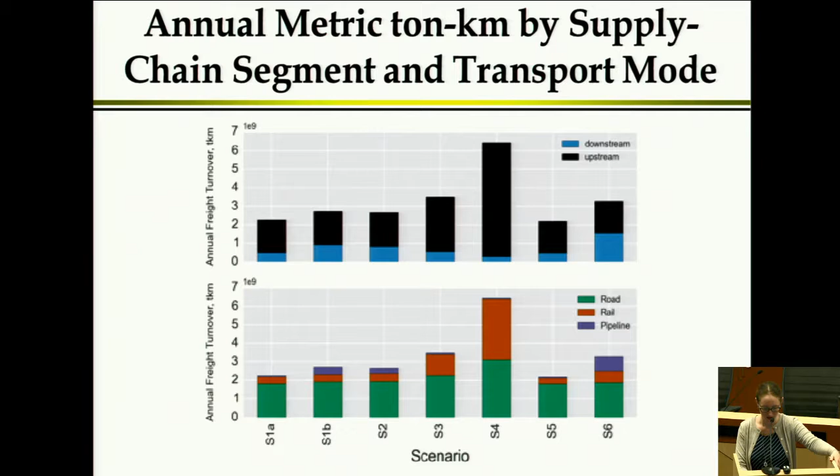California, unfortunately, does not have the extensive rail infrastructure that many other states have. And so what we found is there's biomass out of state that you could transport in for lower or similar greenhouse gas emissions, even though it's farther, because once you get it on a rail line, the emissions intensity of transporting it drops dramatically. But you can see there's quite a bit of road transportation involved in getting the biomass to the biorefinery and getting it to fueling terminals.

So changes in emissions from the 2015 baseline are reductions. So that's good. We compared our scenarios' results to a business as usual. And the result was anywhere from a 3.5% to, I guess the high is like a 13% reduction in total emissions for producing that volume of fuel. Again, reductions in NOx, PM, SOx, CO2. There is not a single plus here to be found. The reductions are modest, but given the volume of fuel we're producing, where you're only offsetting, say, 10% or so of the gasoline market, or maybe a larger share of diesel, that's actually pretty significant.

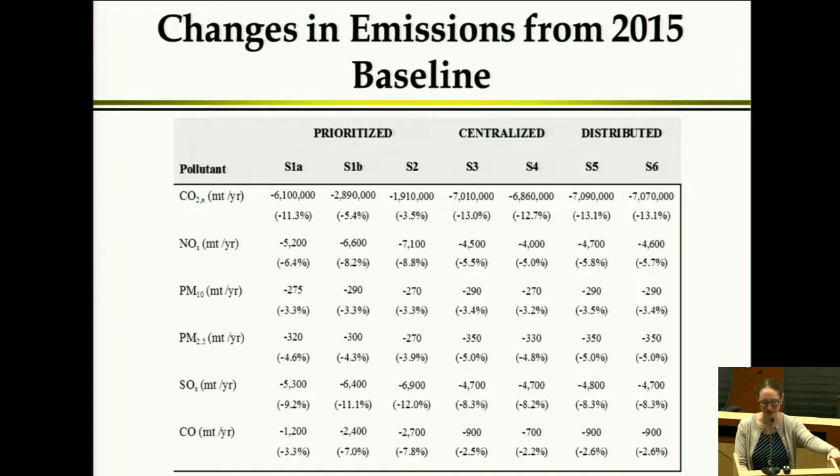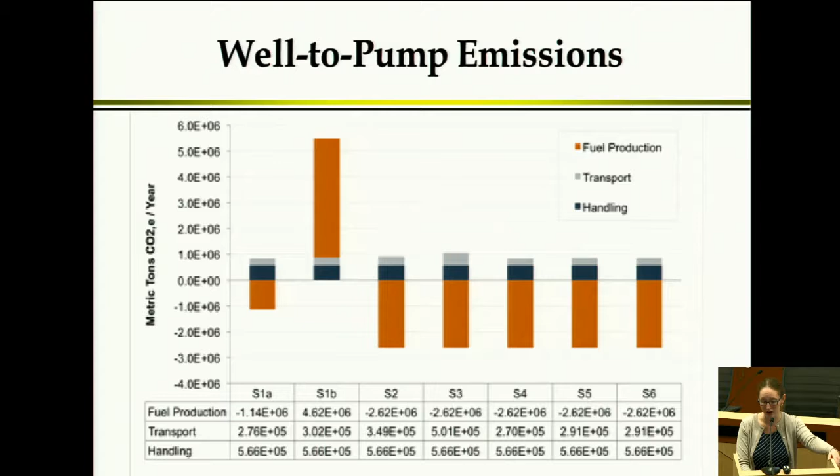So, having done all this analysis, what are the key issues that we found and research needs? The first is the interesting issue of fuel yield. The way we do these emissions calculations now is with system expansion, and as an LCA person, I think very highly of system expansion. I think these offset credits are the most appropriate way to represent net system-wide change in emissions, for example, as a result of building a biorefinery.

The downside is that they basically make any biorefinery that is very efficient at converting all the biomass to fuel look worse, because we assume they would be buying, say, natural gas to generate the process heat and electricity they need on site. They certainly could make arrangements to buy renewable fuel, and maybe we need to be running scenarios where that's assumed.

But that's something that comes up again and again. Even at JBEI, there's talk about figuring out biological routes to using lignin. The downside of using lignin is, right now, you burn lignin and biogas to generate heat and electricity, and you get a really big offset credit for that electricity that you export. And I don't know if we should be analytically punishing the facilities that produce more of the fuel that we ultimately want because they don't export as much electricity.

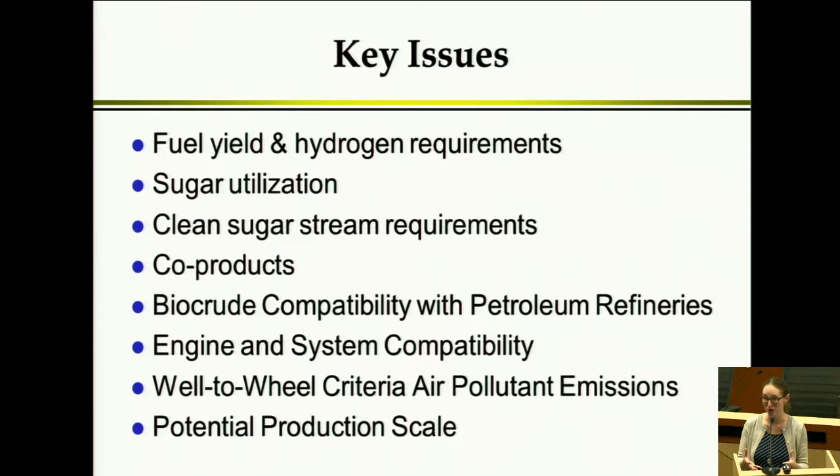And so if you are doing things to electrify passenger transportation, for example, drop-in fuels can be a really important piece of this puzzle, and they are absolutely worth continuing to work on, and certainly worth investing in some pilot and demonstration facilities.